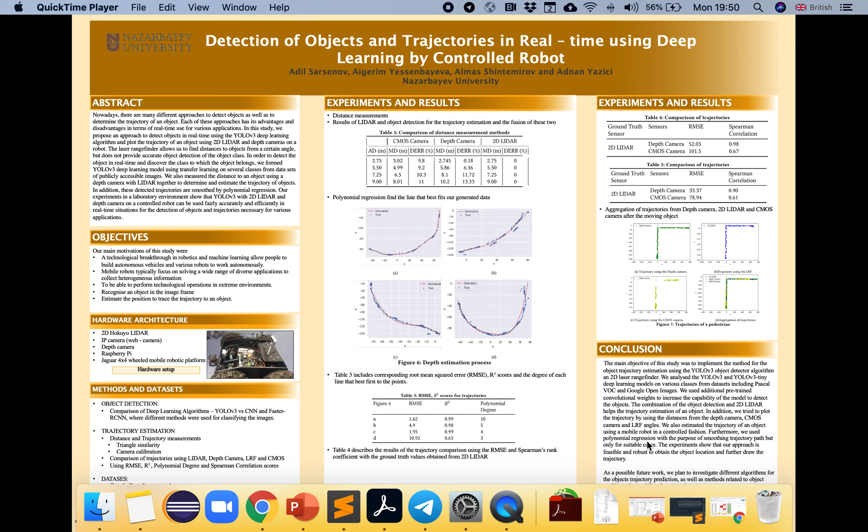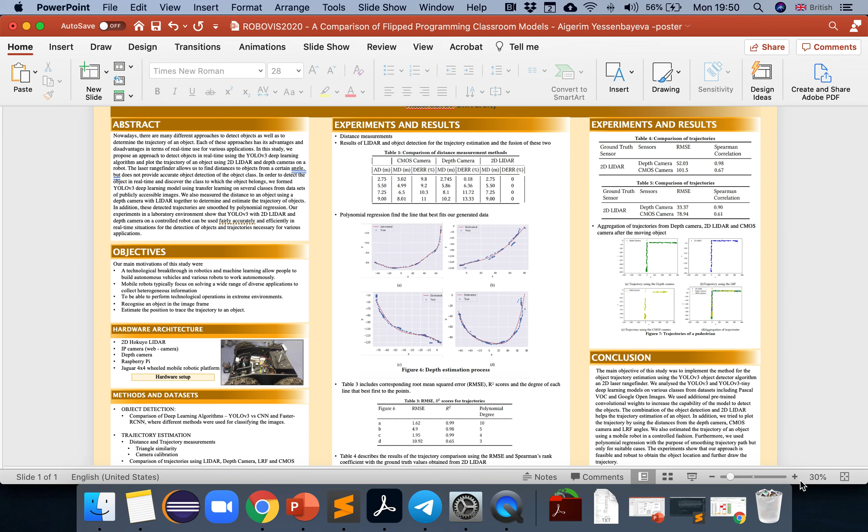So let me start with the motivations of this project. So we know that nowadays robotics and machine learning are one of the trending areas, and the combination of this gives us the opportunity to work robots autonomously. And so if I'll zoom my poster, which I have for today, this is our objectives.

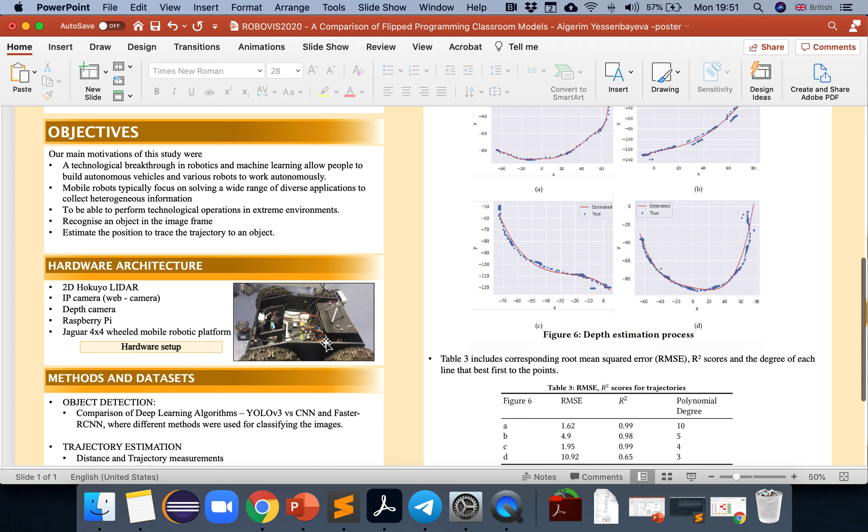Sorry about this. Mobile robots are also useful because they can collect different heterogeneous information, and they can perform basically any technological operations in extreme environments. So every robot definitely needs some input sensors, and for our project, the sensors which we used are Hokuyo LiDAR, 2D Hokuyo LiDAR, IP camera, depth camera, Raspberry Pi, and Jaguar 4x4 wheeled mobile robotic platform.

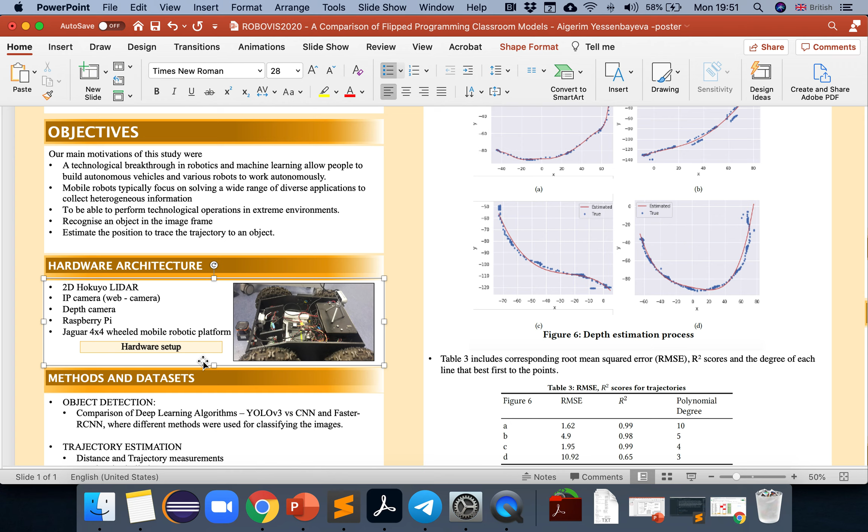So there is a picture of how we built it, and the LiDAR was set up at the very top of the robot. So it had some disadvantages in that it cannot see what is below that. However, it's still perfectly fine with estimating the distance and even trajectory.

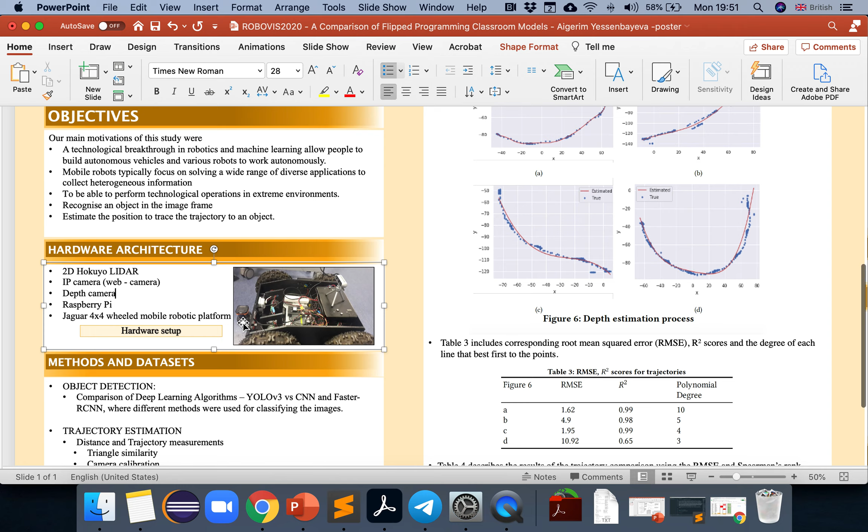So methods and the data sets. In order to work on our project, we used deep learning algorithms, and we compared initially with CNN algorithm for image processing. However, it takes different fragments of the image and then tries to determine the object there and classify. However, this process is very slow, and Faster RCNN is performing a little bit better because instead of taking every fragment of the image, it's basically predicting the object itself.

So YOLO-V3 is even faster because YOLO-V3 is using the pre-trained weights, and can give object detection with high speed. So this process is called transfer learning, and that's the one which we used in YOLO-V3.

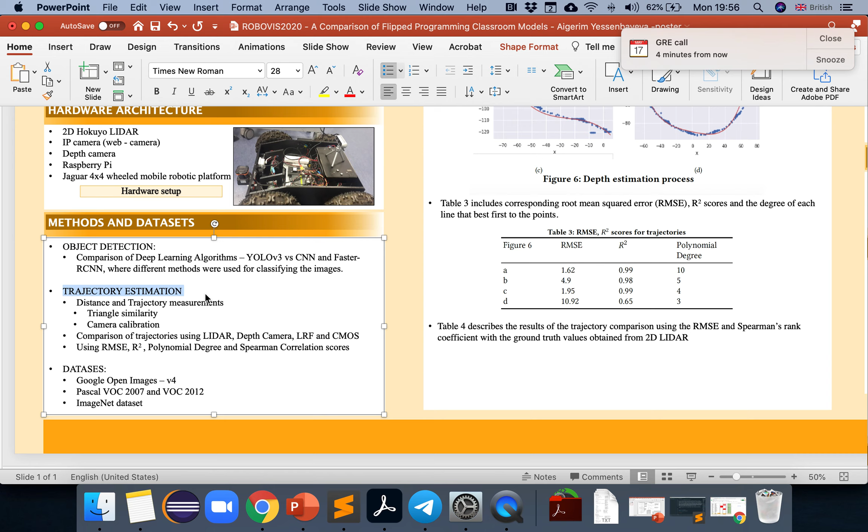So our steps for the whole project were mostly that we used transfer learning, which is using pre-trained weights inside of our YOLO v3 algorithm, which actually detects and recognizes objects. And if the object is recognized, we save the coordinates of that, which we mentioned earlier, in a CSV file. We also plot the scatter plot of all these coordinates, and then we use a polynomial regression, which smoothes our trajectory path to the object.

So we can all see this here in experiments and results. So the first table shows different results for CMOS, depth camera, and 2D LiDAR. So AD is the actual distance.

So we used 4 different experiments with the object located 2.75 meters from the camera, or 5.5 meters, or 7.25 meters, or 9 meters from the camera. So the measured distances are here for the CMOS camera, for the depth camera, and LiDAR camera.

We also can see the errors which we're having for different cameras. As you can see, for LiDAR we have 0 errors, which very perfectly determines the distance for the object. Depth camera can be used with the closer distances. It determines more precisely, much better. But with getting bigger distance from the camera, it's getting a little bit worse with determining the distance.

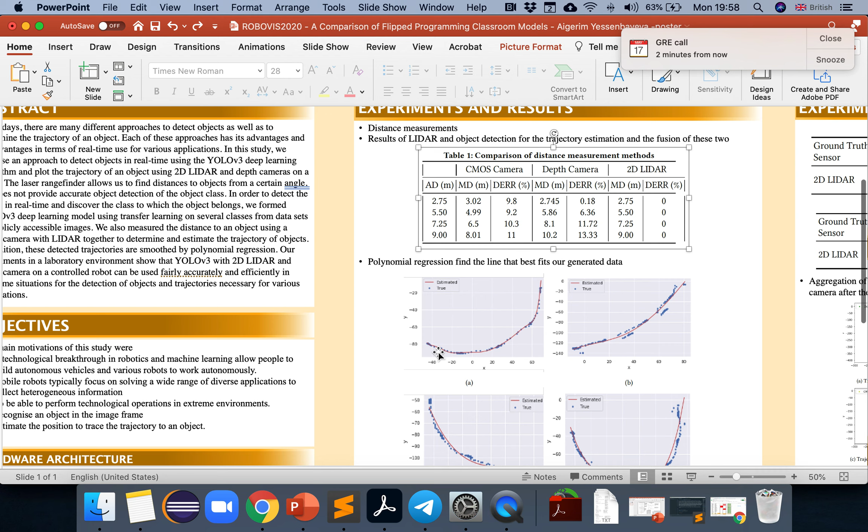And with the CMOS camera, it's pretty much similar regardless of the distance. So CMOS has little error, not that big, and still it's more constant, I would say. Polynomial regression, as I mentioned earlier, is used for fitting our scattered coordinates received from the cameras, and it's represented in these images.

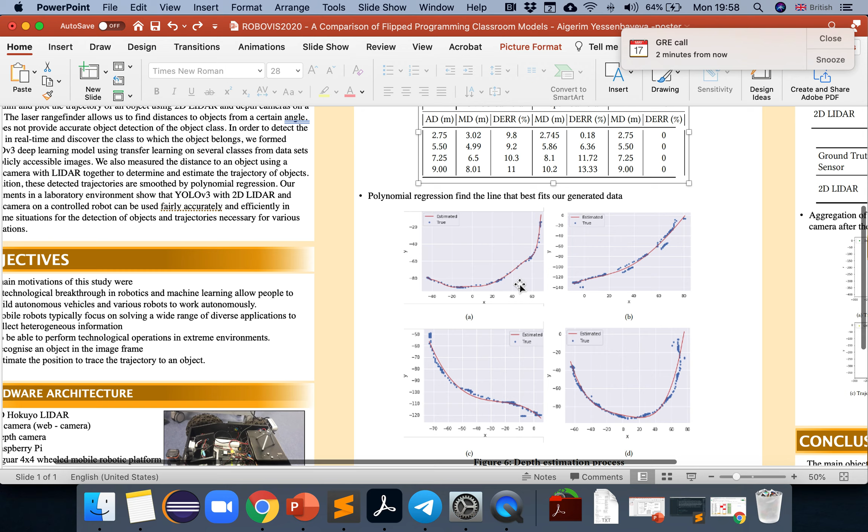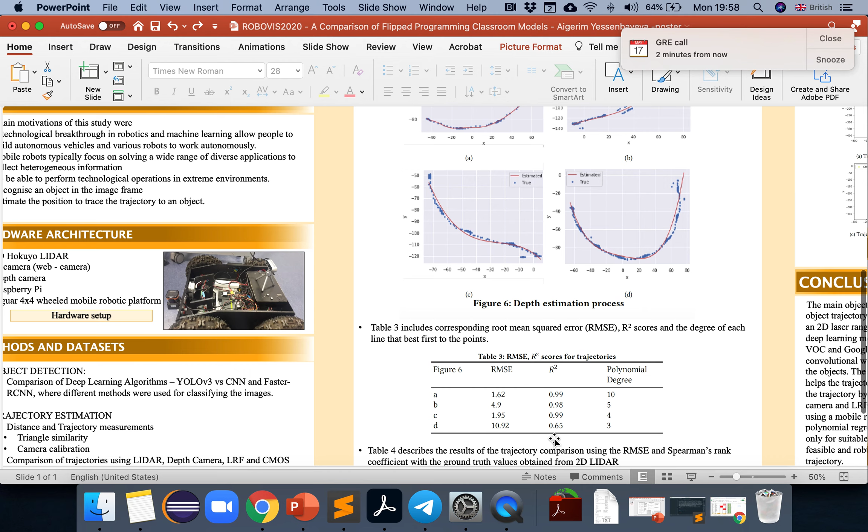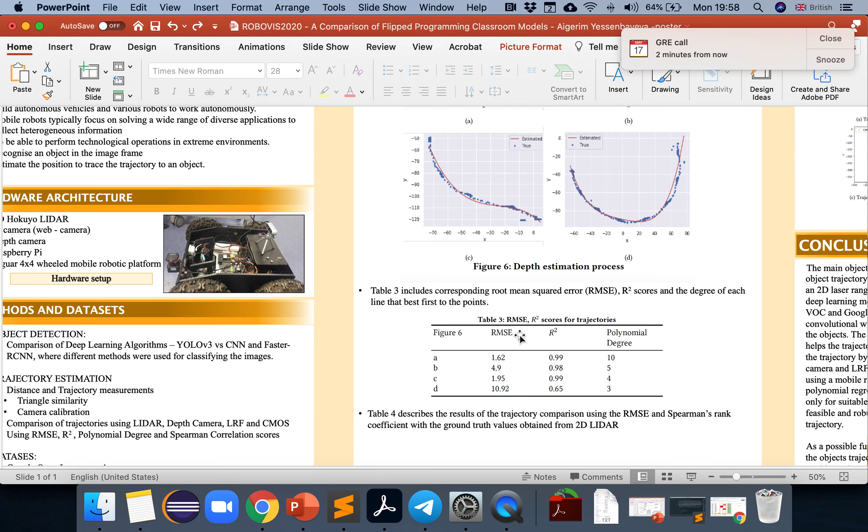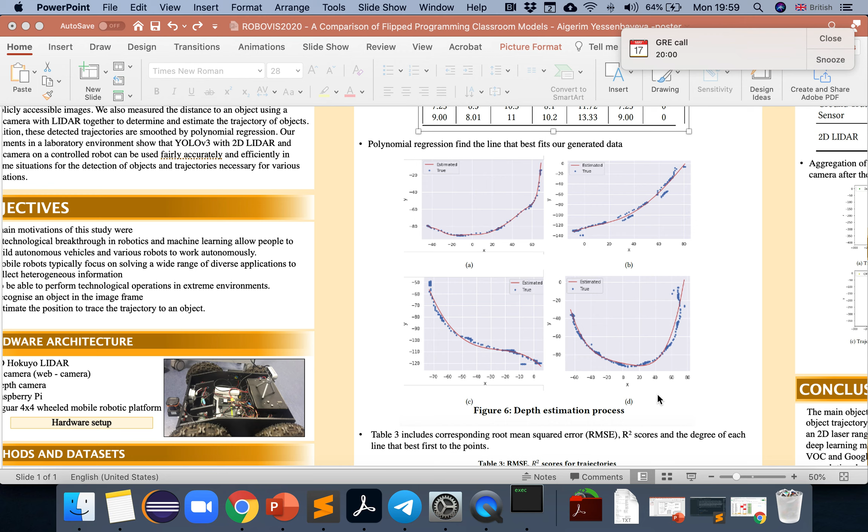There are 4 different paths, and in the next table, based on figure 6, we can see that the figures A, B, C, and D, which are presented here, were measured with different scores: RMSE, root mean square error, R squared, and polynomial degree, in order to determine how they are different.

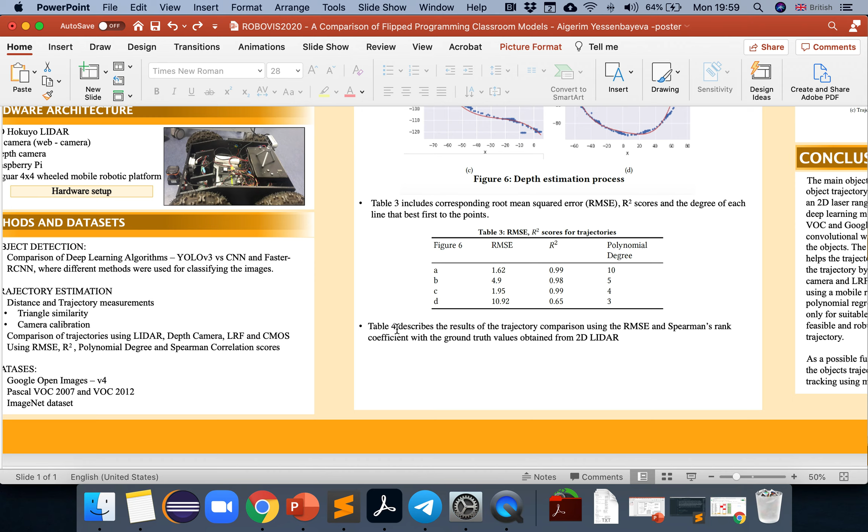So sorry about my reminders. Another table, which is table 4 and 5, and it has to be in the next table.

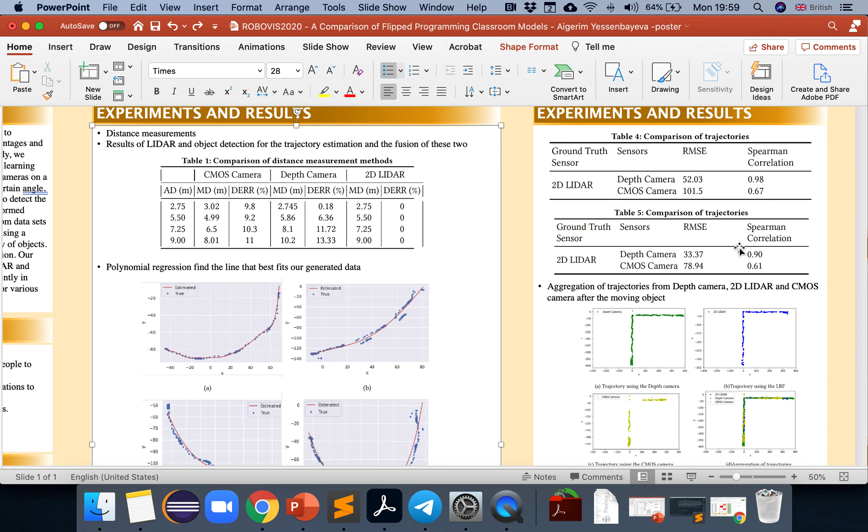So we compare the depth camera with the CMOS camera, and we can see that the depth camera can perform very well, and we used LiDAR as a ground truth because it has more precise results, and we can compare the depth camera and CMOS camera, so we can see from both tables that the depth camera performs better.

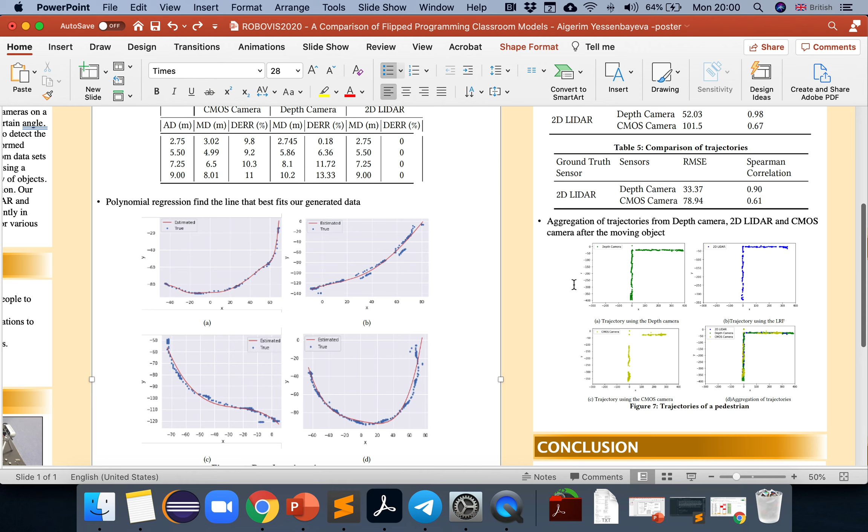The last experiment which we had is the aggregation of trajectories from the depth camera, 2D LiDAR, and CMOS camera. So basically here we use the controlled robot mode when it is moving or following the object. Initially the object is located 6.5 meters from the camera, and here the depth camera and the 2D LiDAR show a more detailed path, while the CMOS camera has quite big distances in the coordinates, so it could be less accurate in terms of determining the trajectories.

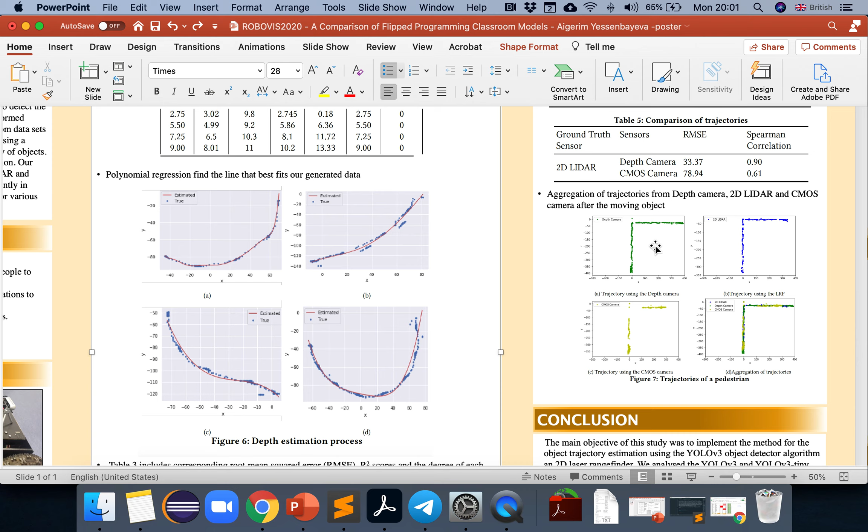So here is the combination of all three cameras. Initially the object is located 6.5 meters away from the camera, and then it gets out of the view of the camera to the right, to a different location or room. So when the camera reaches the point where the object disappeared, it again tries to determine the object and tries to follow it again. So that's the way we experimented.

So the main objectives of the study were to implement the method for object trajectory estimation, the YOLOv3 object detector algorithm, and 2D laser rangefinder. We also analyzed different models with deep learning. We also played with different data sets. We combined VOC 2007 and 2012 in order to get 12 different classes like airplane, bicycle, bus, car, cat, cow, dog, motorcycle, person, horse, sofa, and train.

We trained on NVIDIA, so it was quite fast with YOLO V3. We also used the Google Open Images dataset, and for running Pascal VOC, it took us 5 days with the ImageNet backbone that contains 53 convolutional layers, while it took 2 days for the tiny version of YOLO V3, also with ImageNet backbone, which contained 15 convolutional layers. So we did all these comparisons, and the results are published in our paper.